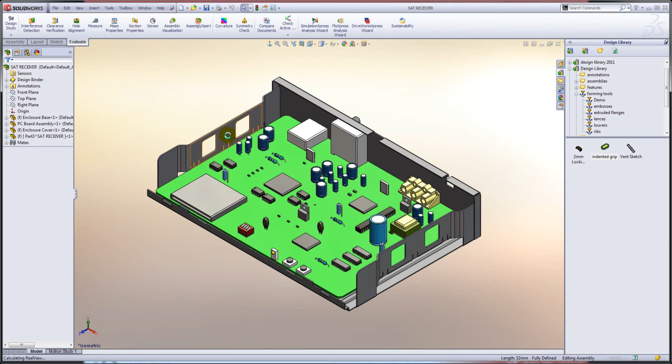Okay, so the first thing I have to do here is insert a brand new component. Now when you do this, the first click is quite important because it will place the front plane of your new component on the face or the plane that you select in the assembly. So I'm going to place mine on here.

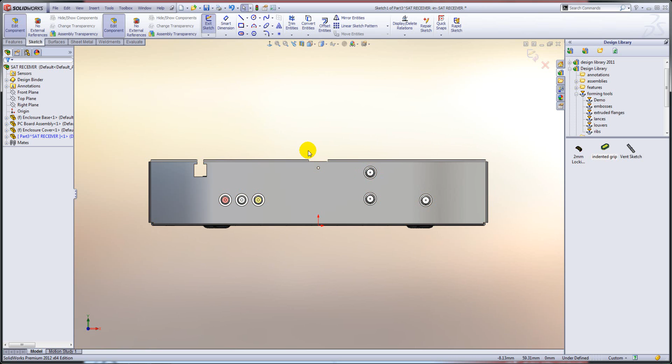Okay, it will also open up a sketch for us on that face. So all our sketch tools are now available to use. We're going to design half the cover and then mirror the body across to complete it. So let's go ahead and do that.

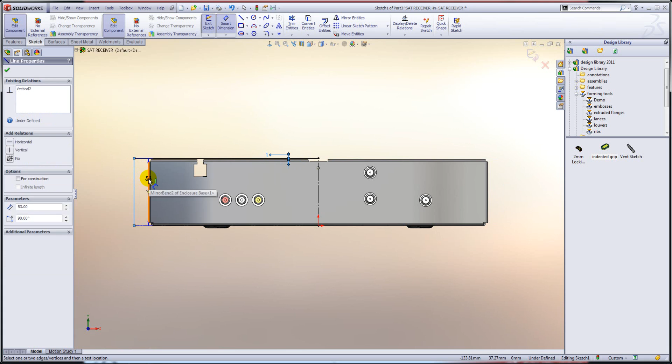Okay, I'm just going to sketch a rectangle, turn these lines into construction, and then determine a 1 mm offset on these edges. We'll also have a solid line along the bottom which just extends 30 mm from the edge.

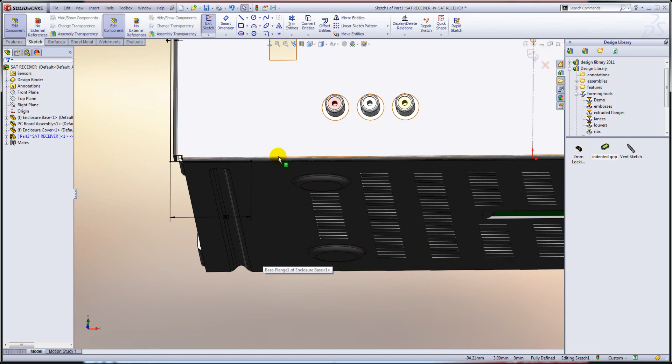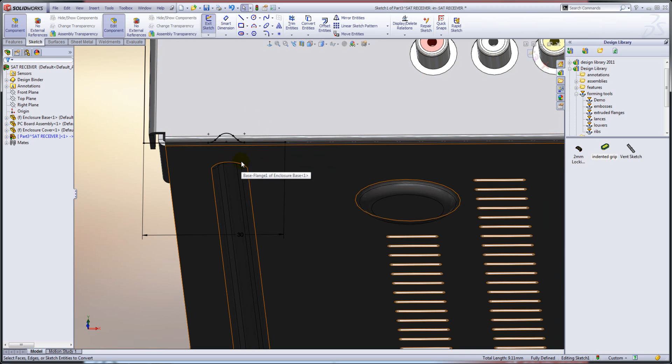Okay, so that's the basic profile I want, but if we look underneath, there's a form in the base plate, and I want this flange to follow that form. So the way I'm going to do that is right click on one of those edges, select the tangency, and then just simply convert those edges onto my sketch plane. I'll then just trim away that small overlap.

Okay, so my first sketch is done. We'll now exit the sketch and take that sketch and turn it into a piece of sheet metal. So we go to our sheet metal tab, and we're going to start off with the base flange tab tool.

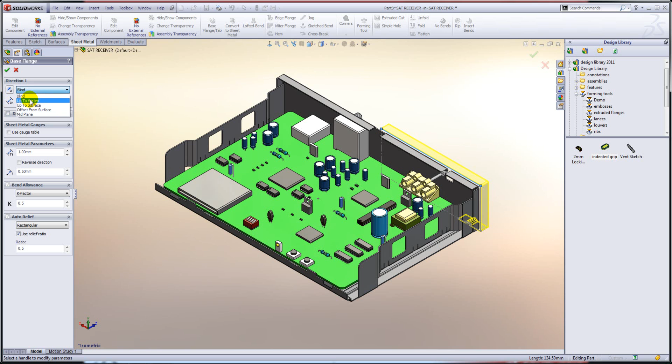Okay, so immediately as I click that, you see a preview of the base flange, and this is very much like the extrude property manager. You can send it in two directions, and you can determine end conditions as well. So in this instance, I'm going to go up to vertex, and the vertex I'm going to go up to is just that vertex there.

Okay, now within sheet metal parameters, we can define the thickness of sheet that we want to use and the default bend radius with it. So I'm going to go for 1 mm with a 0.5 internal radius. If we go normal to the face, you can see the preview there in the sketch, and I can send our thickness of sheet directly above or below that line.

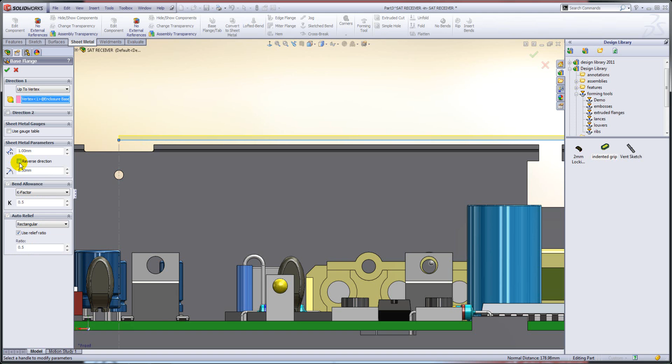With regard to bend allowance, you have several choices in here. You have K factor, bend allowance, bend deduction, or bend calculation. K factor will work out the size of the flattened sheet based on the neutral line. So we're going to use that one. We're going to set the ratio to 0.5.

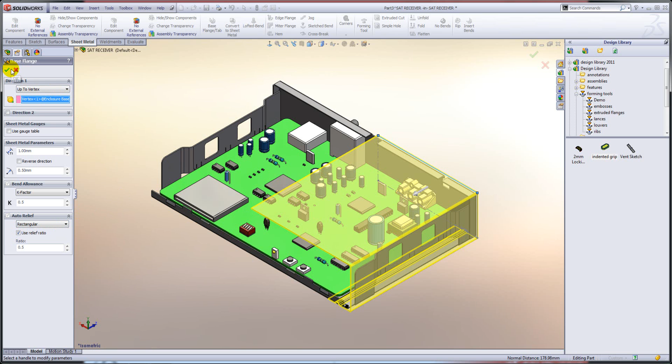We're going to set the auto relief to rectangular, yet we could specify tear or obround. We'll have a look at that when we see it in the model. Okay, so everything looks good there. I'll just press OK to complete that feature.

Okay, so in the part in my tree, that's actually generated 3 features for us. It's generated a sheet metal feature, which consists of all our default bend radiuses, reliefs, bend allowances. We have our base flange, which consists of our sketch and all the flanges that it's created. And our flat pattern comes in suppressed. And if we unsuppress that, the sheet will actually flatten live on the screen for us.

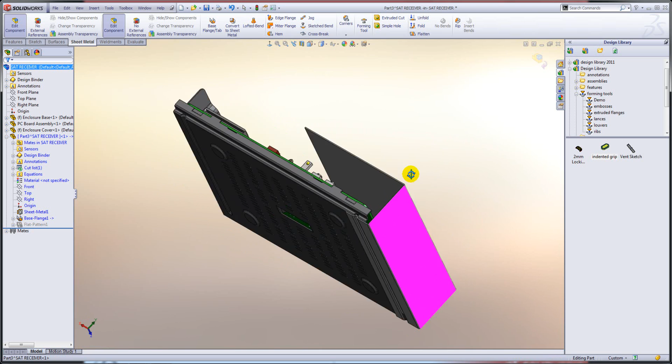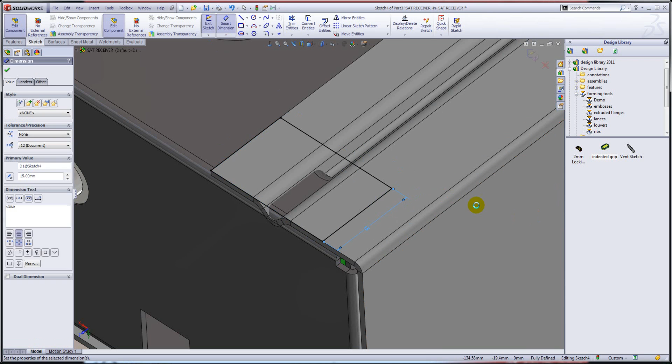Okay, now if we look at the underside of this, you can see that we've got an interference. So we're just going to remove that interference now, just with a simple cut. And I'm just going to ensure that the cut extends past that curved flange.

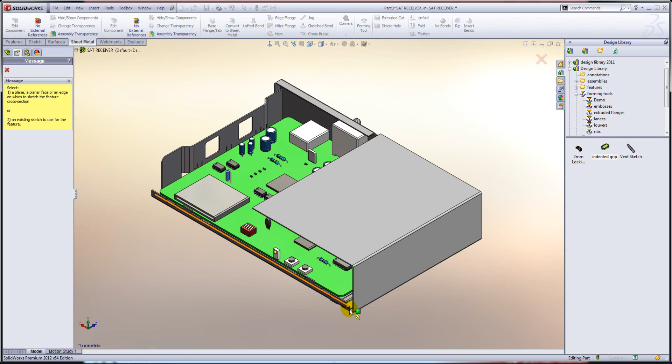Okay, the next thing we're going to look at here is a tool called the miter flange. Again, you'll find this on the sheet metal toolbar. We can select it and then select the edge that we want the flange to run along. So in this case, it's this edge here. And we're just going to zoom in on that corner.

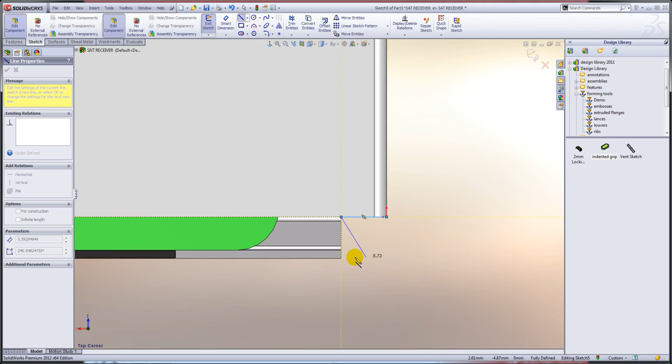Okay, so with the miter flange, you draw the cross-sectional profile of it. And one of the nice things about the miter flange tool is that you can draw multiple bends with it. So if I add 2 lines, for instance, it will create 2 bends, as you can see there. Okay, so at the moment, we're currently using the default bend radius.

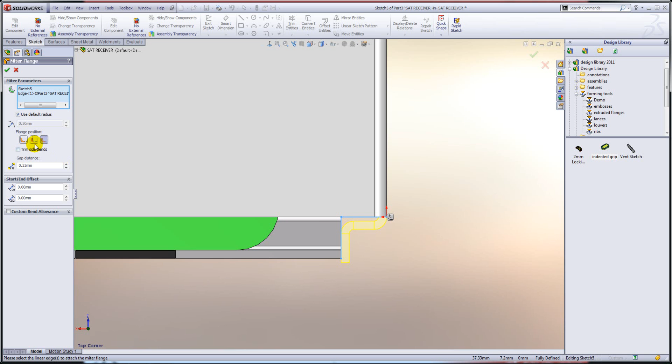We can specify the flange position as being inside, outside, or with the bend outside. In this instance, we're going to go material outside. We can also select multiple edges. So you can see that as I do that, in the preview, it automatically miters the corner for us. So it's a very powerful tool.

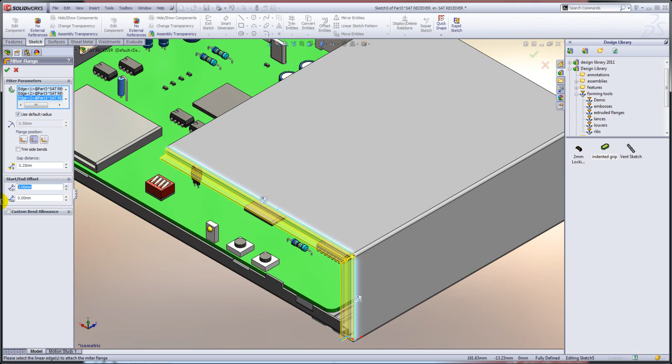Also, when we have multiple edges selected, this rip gap becomes available to us. And as I start changing that, you can see it changes the gap in this area here. We can also determine a start and end offset. So if I set that start offset to 4, for instance, it will just create a gap there, an offset of 4 before that flange starts.

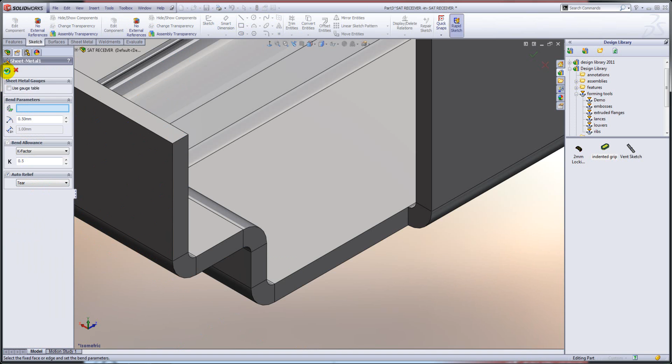Okay, so now that that's done, we'll just complete the feature. And if we zoom in on this corner here, you can see that it's put our rectangular relief in. Now, just to show you the difference between the relief types, if we go back into our sheet metal feature, tear will actually tear the sheet. And obround will just round that relief off, like so.

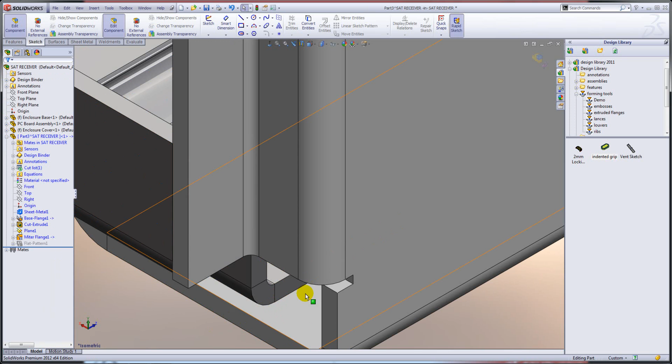Okay, another tool that we use commonly in sheet metal is the edge flange. Very simple to use. Just select it from the menu and then simply select an edge and you can drag a flange off in either direction. The angle of the flange can be determined within the property manager. And if you have lots of complex angles, a handy thing to use is perpendicular or parallel to face. So you basically select a face in this box here and then define whether it should be parallel or perpendicular to that face.

Flange length can be determined here. So again, we have various end conditions. I'm just going to fill in a value of 12. And that 12 dimension can either be taken from the outer virtual sharp, the inner virtual sharp, or from the tangent bend. So that's new to 2012. And what that basically means is that, let's say you had an acute angle that you were folding to. The dimension that you give it will be taken from the tangency of the bend. So imagine measuring it with a vernier, for instance.

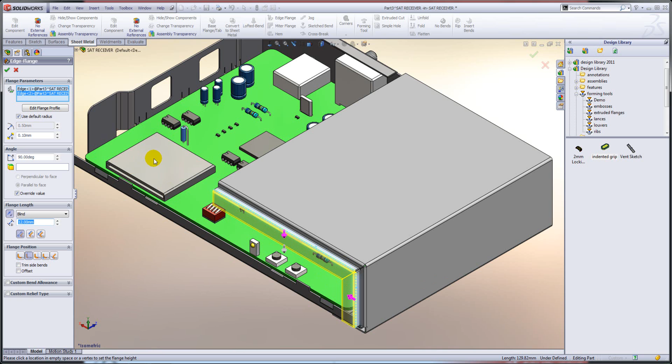Okay, so in this instance, we're going to go from the outer virtual sharp. You can also determine the position of that flange, material inside, outside, bend outside, from the virtual sharp or from the tangency of the bend. Okay, so in this instance, I'm going to go material outside. And I'm also going to select a second edge. So again, this is a very powerful tool. You can see it automatically miters that corner for us, which is great. We'll just press OK to complete that feature.

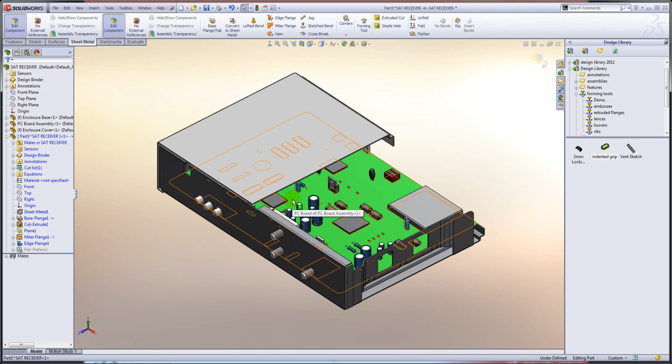Okay, so you can see what we've got. What we want to do now is actually mirror that whole body across. So we'll just spin it round and zoom in. Okay, so we mirror this pretty much as we would within a normal part. Click on the mirror tool.

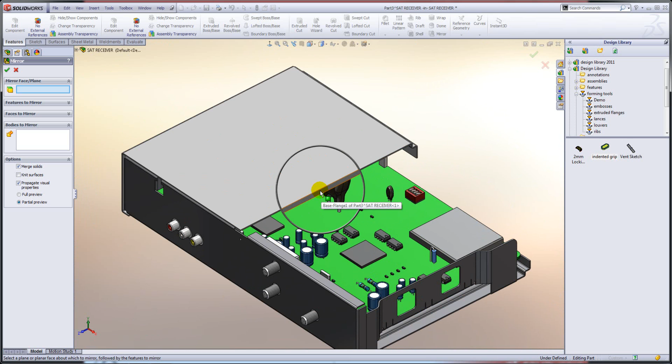One of my tips with working with sheet metal is because you have a lot of small faces, very thin faces, you might find that you're constantly zooming in and out to make selections. I like to use the magnifying glass a lot with sheet metal. That will just allow me to zoom in on a particular area of the model rather than zooming in on the whole lot. Okay, so from there I can pick the face and then just simply select a body to mirror. And there we have it.

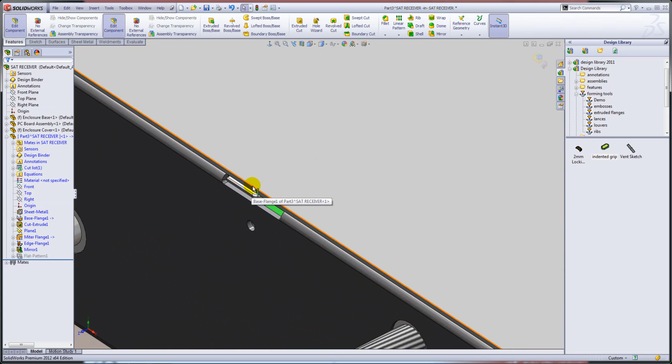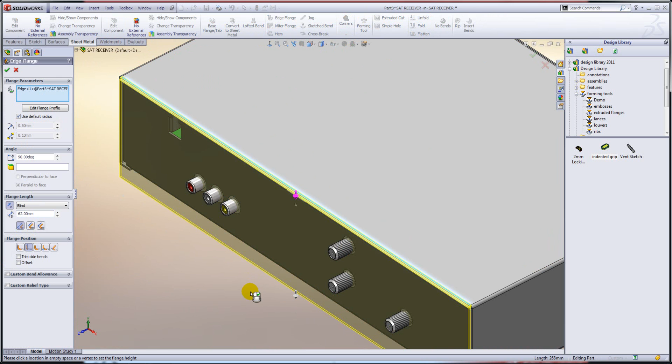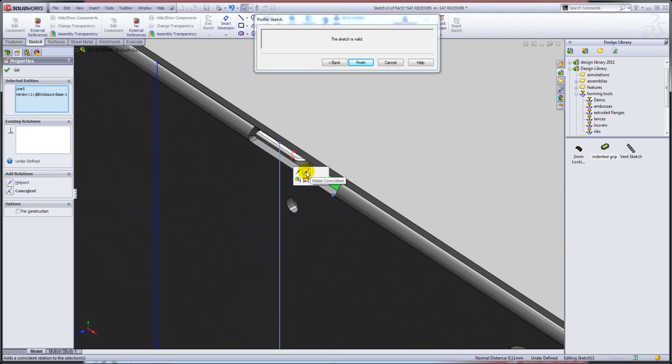The next thing I want to do here is I want to create a flange that sits inside that slot that we see there, which will eventually be fixed through this hole here. So with this we use an edge flange, but you can see that when we select edge flange, it selects the whole length of the edge, and that's not what we want. So we can just simply edit the flange profile, and that takes us into a 2D sketch, and we can start manipulating these sketches to be where we want. So all we'll do is zoom in and I'll create some relationships. Like so.

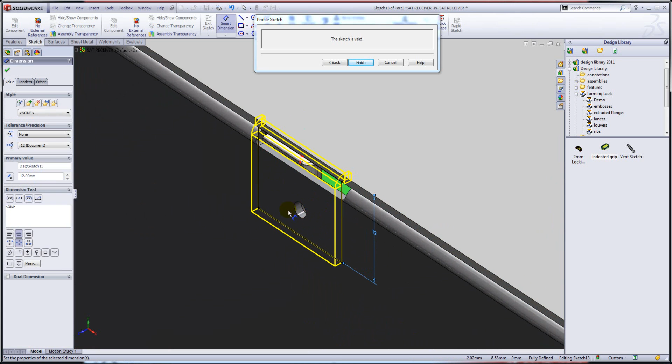Okay, now with this flange, at the moment we've got a closed profile. So it is important that you have a closed profile when you're working with this. But you can have a multiple contour profile as well. So for instance here I can select the edge of that hole and convert it to entities. So we actually design this with the hole in it.

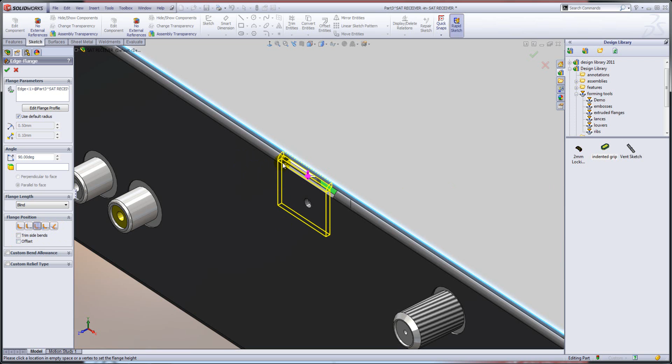Now if we go back, we have our choice of flange position, so it can sit inside, outside, bend outside, and so on. None of those give us exactly what we want. So to get it to sit all the way inside, we can use this offset. And that will just allow us to drag this out by a distance or an end condition.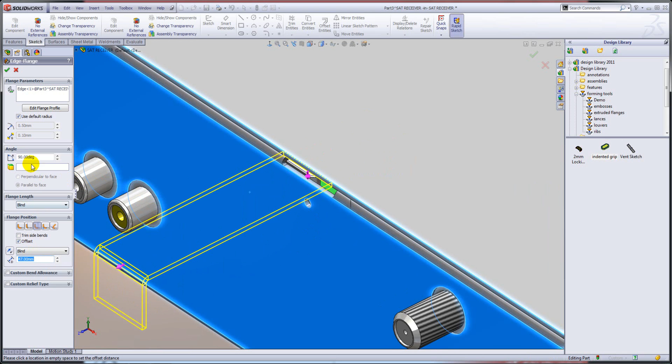And the nice thing about this is it can go either way. So what I want to do is specify a distance of 1, but have that sit inside, like so. Press OK, and you can see that it's done a really good job of that. And again, we can see the reliefs, and you can see the hole that has been placed in there as well.

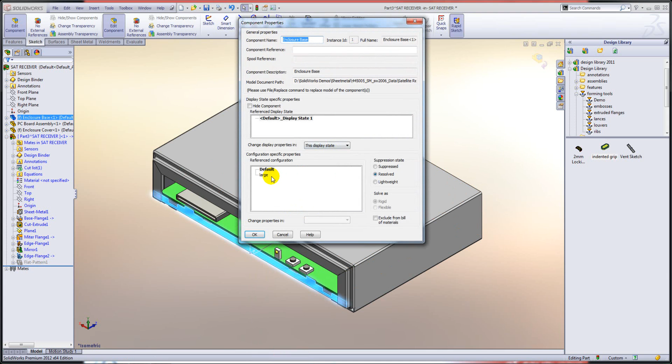Okay, so because we've designed this in context, we've created relationships between the cover and the base assembly, such that if I was to go in and actually update this base assembly to reference the large configuration, you can see that our cover will update with it. So you're building in some nice intelligence into the model there.

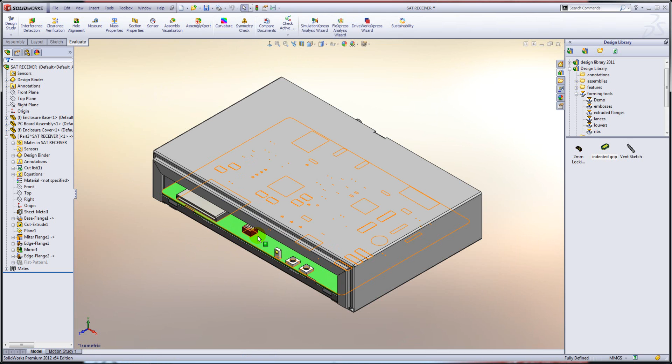Okay, now currently this part, this cover part, is internal. It has no external file at the moment. So what we're going to do is save this externally. First thing we do here is rename the part. We'll call it cover. And then just simply right click on it and save the part in an external file. And I'll just save it at the same path as the assembly.

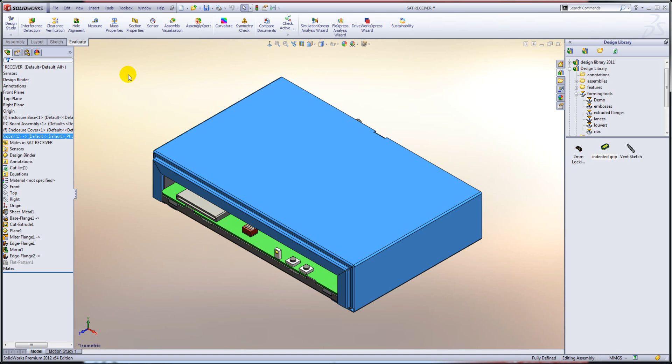Okay, now you might have noticed that the square brackets from around the cover in the feature tree have disappeared. That just indicates now that this part is saved externally. We can open this part in its own window and start to make some changes to it here.

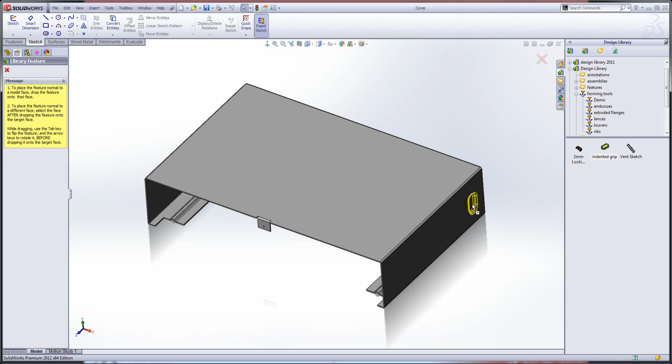So the first thing we're going to look at is the form tools. We have a Form Tools folder in our design library, and you can just choose to drag and drop a form tool in. You'll get a preview of it as you drag and drop it. You can flip its direction as you're dropping it or after the event. So as I drop it, that will launch the Property Manager down the left-hand side.

Now, this has had a revamp in 2012, so you'll see now we can really easily change the angle of the form tool, or we can flip the tool so it goes in either direction. We now have configuration support for form tools, so if you've created multiple configurations of a form tool, you can just pick which one you want from this drop down list. And we also now have the ability to link to the form tool, such that if you make any changes to your form tool, they will propagate through to anywhere where that's used if you want them to.

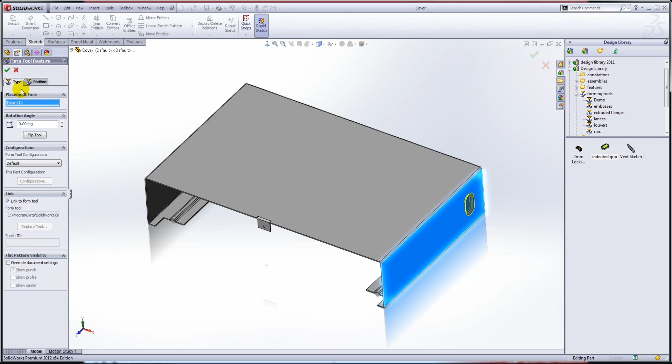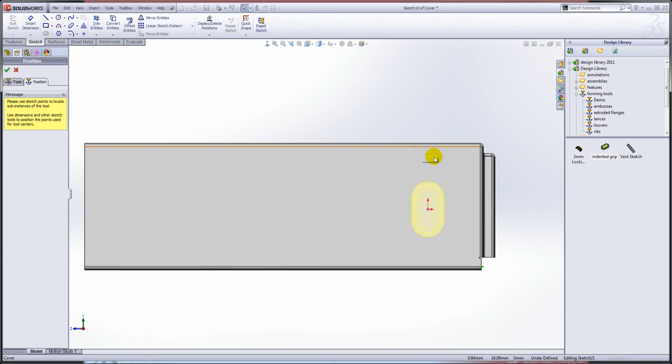This is now very much like the Hole Wizard Property Manager, where you select the type and then you define the position. So what happens here is it automatically selects the point tool for you, and if you want to add multiple instances of this form tool, you just simply add more points. Okay, I'm just going to dimension this. Like so. And then we'll hit the green tick to complete the feature.

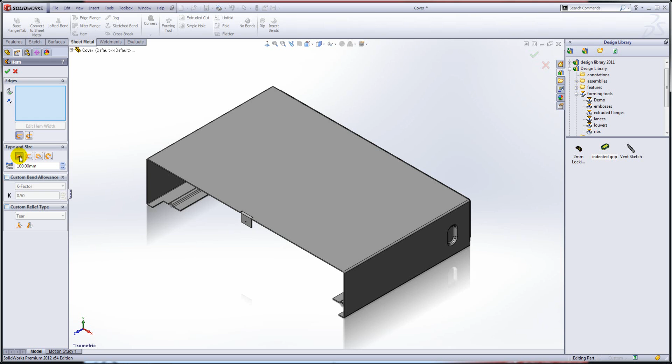Another nice sheet metal tool that we have is the hem tool. So with this tool, we can select edges where we want to apply the hem. You have a choice of several different types of hem. You can have closed, open, teardrop, or rolled. In this instance, we're going to go for closed. We'll come in and select an edge, and there we can see the preview of it, and we'll just set the size of that to 12mm.

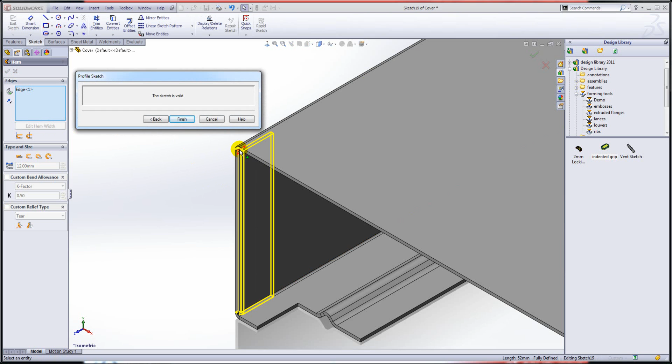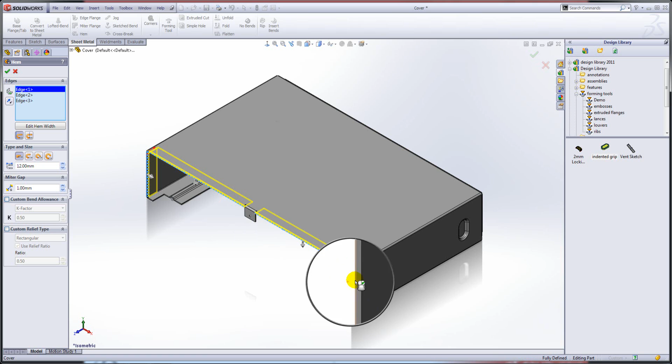Okay, now with the hem you can set the material inside or outside, and if you don't want it to run the whole length of the edge, you can edit the hem width and then just start dragging that sketch about. Okay, now I want to add multiple edges with this hem, so we'll use our G key again just to aid us in selecting our edges. Press OK to complete the feature.

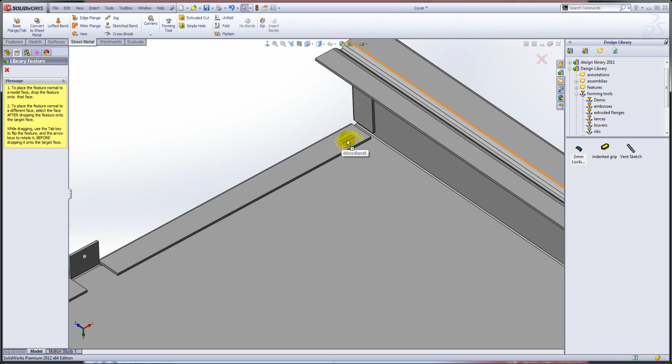Okay. On our hem we'll add another form tool, so I've got another one here, and we'll just drag and drop that on like so. And I just want one instance of this for the moment, and we'll just dimension it from this edge to here at, let's say, 15mm, and then 6mm from that back edge.

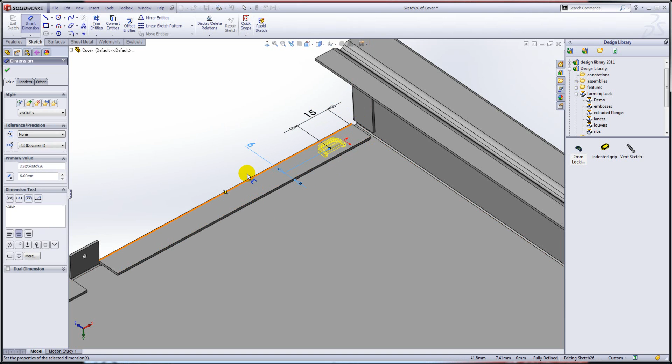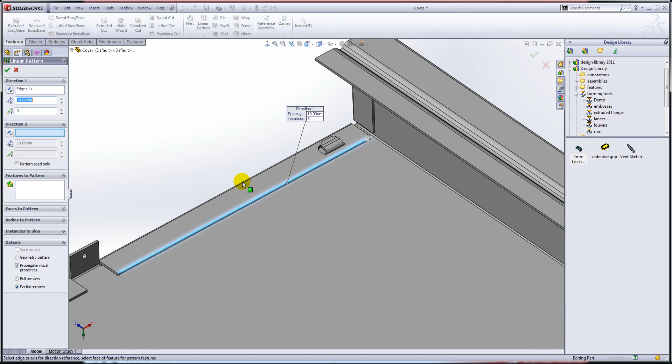Okay, now I actually want multiple instances of that, and the reason that I didn't do it in the Form Tool Property Manager itself is just to illustrate the point that you can actually pattern these form tools. Like so. And it's worth pointing out that we can also mirror them as well.

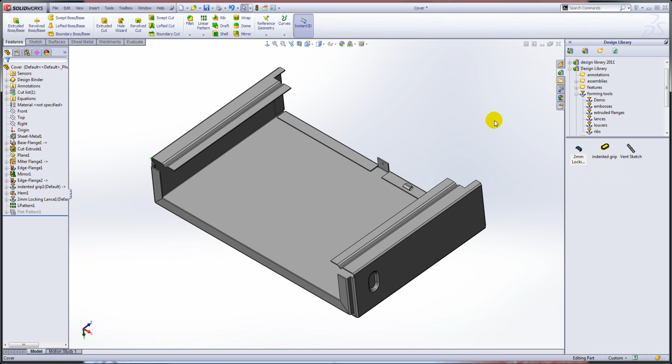Okay, so we'll take the pattern and the indented grip, and we'll mirror those about our right plane. Okay, so that's our part almost completed. There's a few other little bits and pieces I want to do here. One of the first things I'm going to do here actually is add some fillets.

So everyone's probably used the fillets that you'll find on the features toolbar. You may not have come across the break corner trim tool on the sheet metal toolbar. That will just basically allow you to do a simple fillet or chamfer. So what's the point of using it? Well, basically it's specifically for sheet metal parts, and it just makes the selection so much easier.

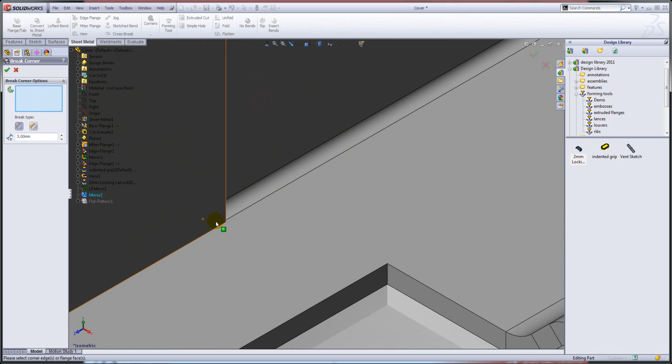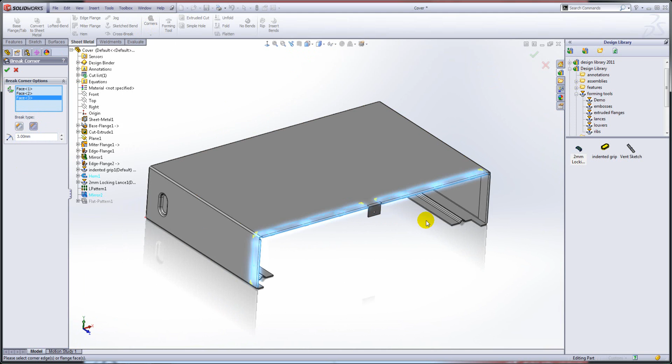If we were to use a normal fillet tool to remove some of the sharp corners, we'd have to zoom in on each edge and select that small edge there, often selecting through geometry. With the break corner tool, you just specify what you want, the size of the rad or chamfer, and then start picking faces. And because it's sheet metal, it automatically knows where to chamfer or fillet. So the selection process is much simpler there.

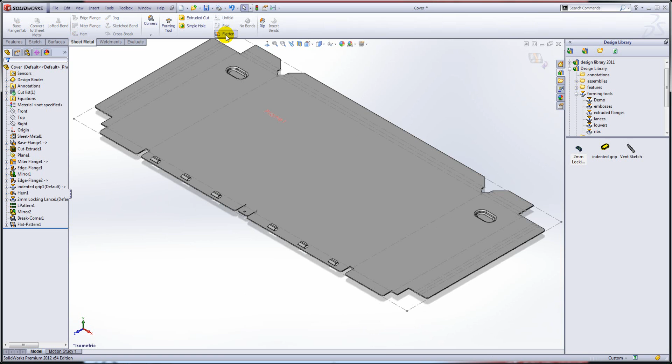Okay, now the flat pattern at the moment is suppressed, and to unsuppress it you just simply click on the flatten button, and we should very soon see a flat pattern of that. There it is. And what we want to do now is look at how we can reference that flat pattern within a drawing. Okay, so I'm going to just draw your attention to the configuration manager, and within here at the moment we just have our one default configuration.

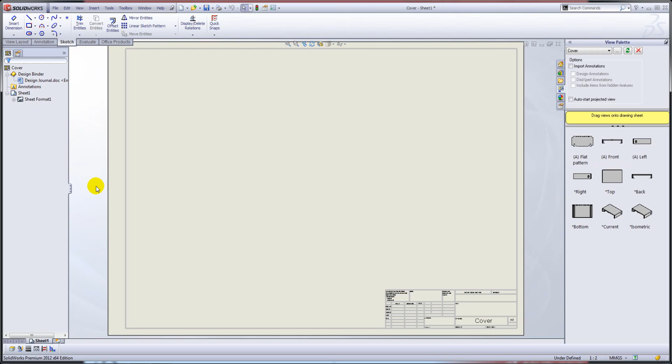Now if I go to File and then Make Drawing from Part, we'll pick our border. You'll notice that in the view palette we have all our standard views, but we also have a flat pattern view. Let's just drag that in and we'll change the scale to, let's say, 1:2. Okay, so how does it get that flat pattern view?

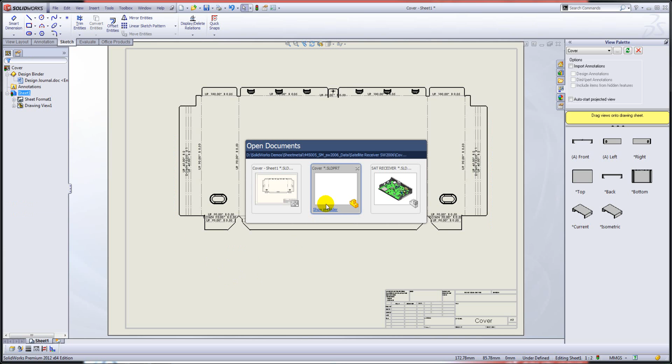Well, what happens if we go back to the model is that a new configuration is automatically generated as soon as you use this part in a drawing. It creates a flat pattern configuration. And if we just split this in two, in the default configuration, that feature remains suppressed. In the flat pattern configuration, it's unsuppressed. Okay, now it's quite important that once you've created your drawings, etc., you keep the default in the folded state and the flattened in the flattened state.

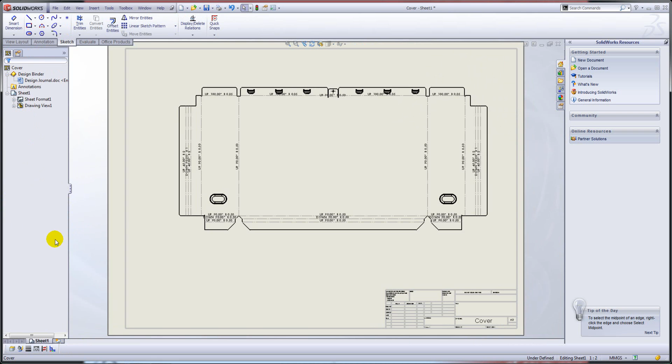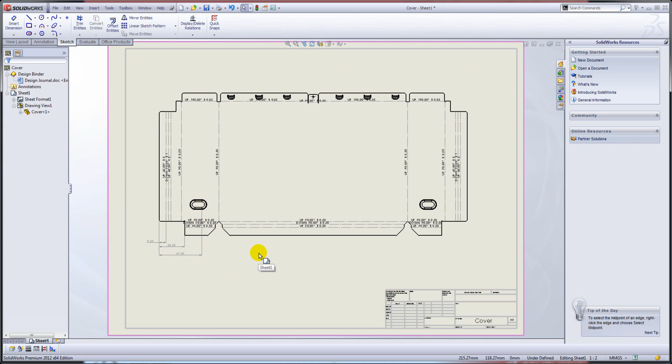Okay, so back to the drawing now. What can we do with these drawings? Well, as you would expect, we can dimension them. We can dimension to bend lines, to model edges, to form edges, etc. We can also make these drawings look a bit nicer and a bit easier to read by harnessing some of the additional options for sheet metal within our document properties. So to do that, we just go into Options, Document Properties, Sheet Metal.

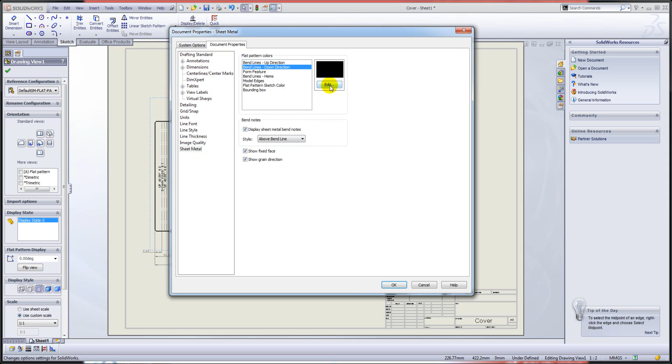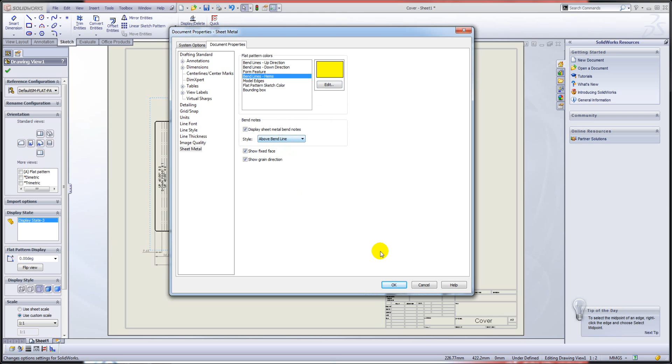And within here, for instance, we can change the bend line colour in the up direction to, let's say, blue, in the down direction to red. We'll change the form features to an orange, bend lines for hems to, let's say, a yellow. You can also determine where your bend notes are. They can be above, below, or with the leader. Okay, so by doing that, the person that's actually making the part has a better visual guide of how it actually is made.

Now from here, a lot of people that use laser cutters and punch tools will tend to save that out as a DXF. There's a couple of things that can go wrong when you're doing that. One of the things is the scale. Let's say we put this on a scale of 1 to 5. People get confused when they're saving as DXF what scale they are saving out as.

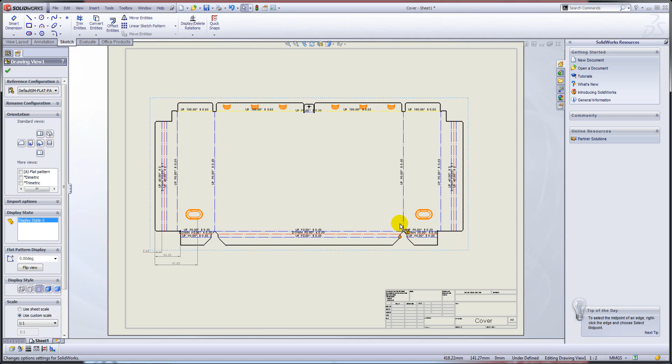The other thing that people have to do is remove quite a lot of the detail. So perhaps they don't want the bend lines, the bend notes, the border, the form tools, that sort of thing. A lot of the time they just want the outside profile. So in my opinion, it tends to be better to save it out as a DXF directly from the model itself. It's very simple to do. It's just a case of right-clicking on the model. Doesn't matter if it's in the folded or flattened state, and then go and export to DXF or DWG.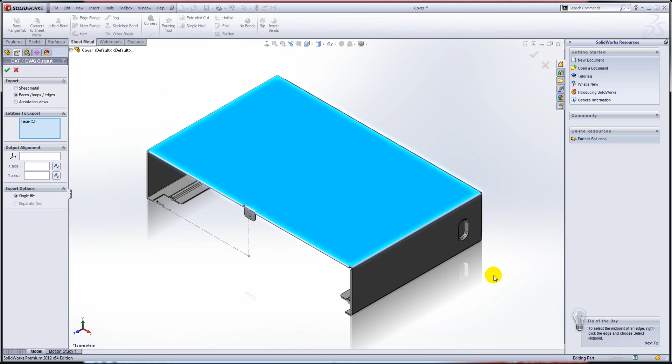At this stage, we give it a name, and we just have to ensure that we select sheet metal. Now, it gives us some options here of exactly what we want to export. So we can export the geometry, so we want to do that. We can include things like bend lines or exclude them, sketches, library features, form tools. It's up to you what you want to include and exclude. In this instance, I'm just interested in the geometry.

So I press OK, and that will launch a preview window of exactly how that will save out. So there it is there.

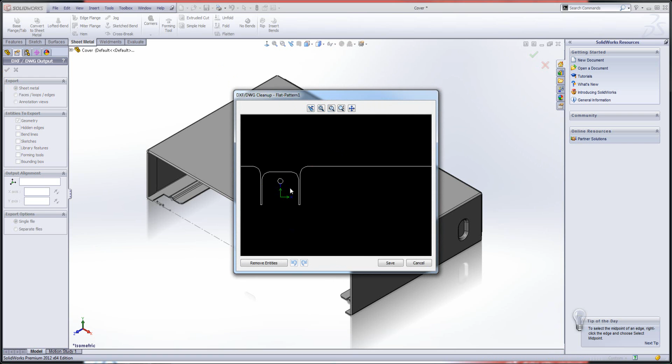Again, the nice thing with this is that you can clean it up prior to actually confirming the save. So let's say, for instance, we are only interested in the outline. We can take that hole and just remove it. Okay, so now we're ready to save it. We can just click on save, and that's done. And it will always save out at a 1:1 scale.

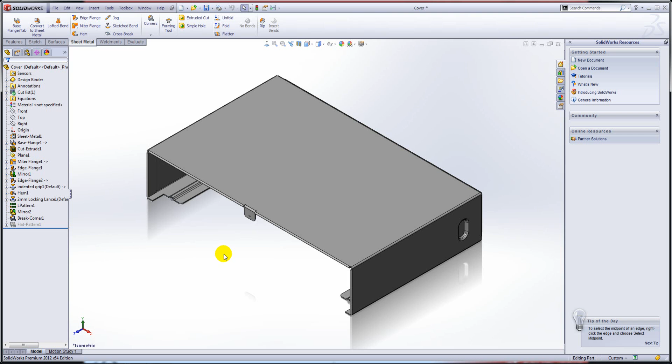Okay, some other nice tools that we can use in sheet metal. One of the things that isn't necessarily for sheet metal, but just a standard tool that people tend to not use so much, is the fill pattern, and it's quite a powerful tool. You pick a face, select the fill pattern, define your fill boundary, which is a face or a collection of edges or sketch lines. You can define your pattern layout from the options there.

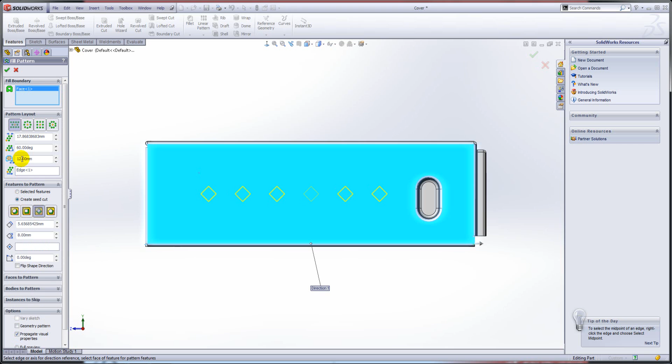I'll skip that and we'll just go to create seed cut. This is where we can use a predefined shape to cut our model. Now we'll go back up. Well, let's in fact just change some of these dimensions.

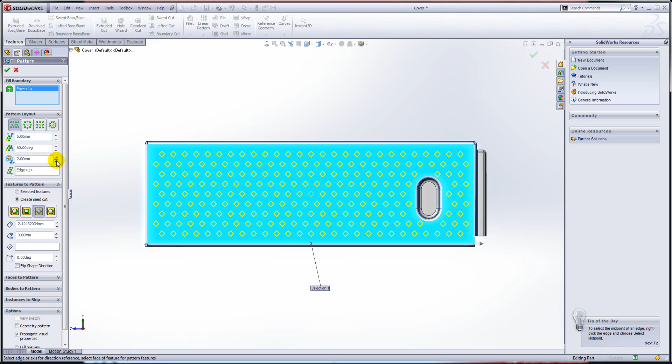We're just going to set it to have a 6mm spacing, 60° stagger angle, and a margin of 12mm. Now you can see it's really intelligent in as much as that it will actually go around features and try its best to fit those pattern cuts in.

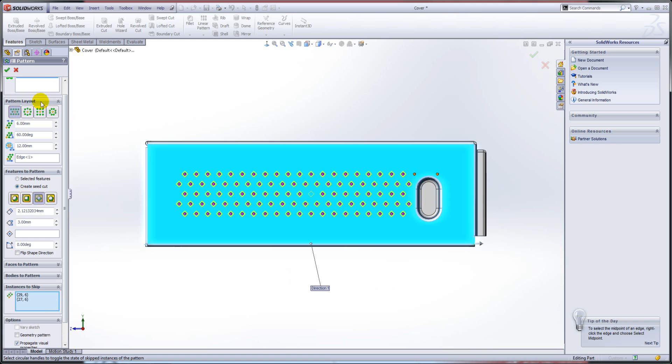Now let's say, for instance, I don't want all of those. I can come down to instances to skip and just remove a couple. And when I'm happy, I can press OK to just complete that feature.

Okay, from the design library, I'm also going to just drag in a sketch. And we're just going to place that sketch on the origin with a coincident relation. And add a dimension to constrain it.

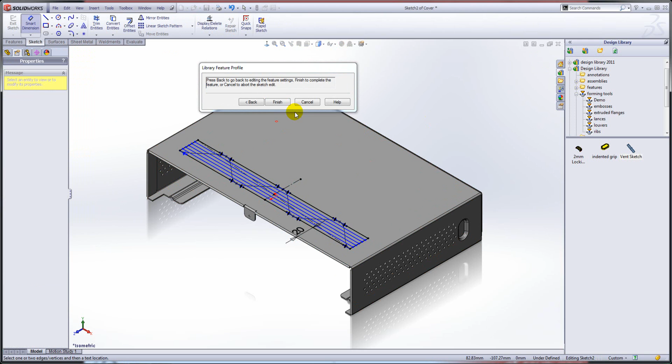Okay, now I'm going to use the vent tool to create a vent in this sheet. So again, some of you may not have come across this tool. I'm going to launch it using the command search. So to do this, we just tap S on the keyboard. And if you look at the top right hand corner of the screen, by pressing S, it actually activates the command search. Then from there, if we just type in vent, you can see it finds a tool for us.

We can launch a tool directly from there. Or if you want to know where it is for future reference, just click on the glasses and it will place a subtle red arrow next to it. Okay, so we'll go ahead and launch it.

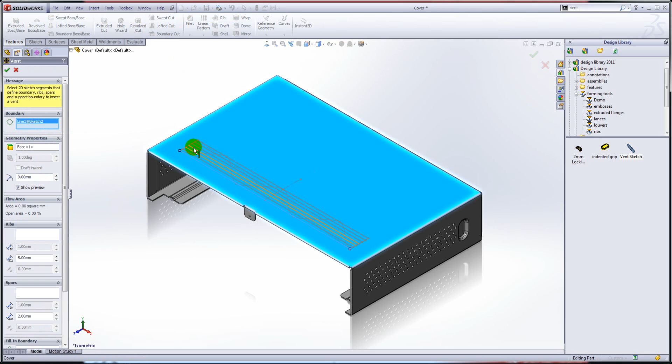First thing it asks us for is the boundary. So we're going to select the outer rectangle of that sketch. It will then ask us to define our ribs. So all we do here is select the internal portion. Let's just change the width of those to 1.5.

And we'll also select the spline as well. Okay, so within here you can define the width of the spar and ribs. You can't, with sheet metal, define the thickness because it's sheet metal. It has to be of a uniform thickness throughout. You can define whether you want radiuses. So if we zoom in and just turn on 0.5mm radiuses, you'll see the preview change, like so.

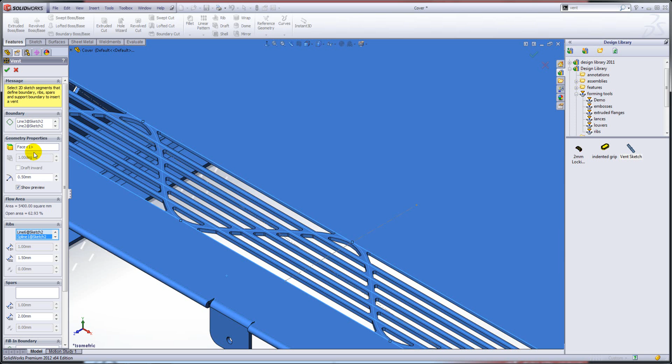And let's say it's a plastic part, you can add draft to it as well. To complete the feature, we just press OK. So very quickly, we've created our vent. That for me is a very powerful tool.

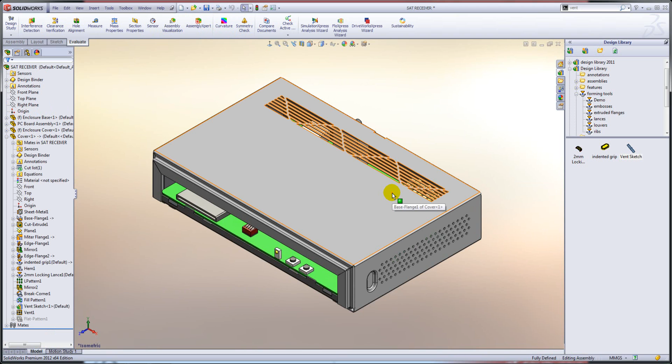Okay, now if we go back to the model, you can see all of those changes have propagated through. And the last thing we're going to do here is just insert face bezel. So we go to Insert Components, browse to our face bezel, and we'll just insert it. Now just notice within here we have a little star symbol next to our component.

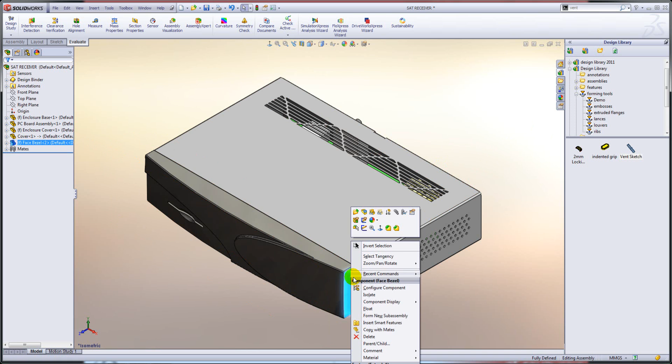That just indicates that it is a smart component and you can bring features through with it. To insert those features, just right click, Insert Smart Features, and then just pick the reference face that you want to apply that to. So we're just going to select the face of our cover, press OK, and if we isolate our cover, you can see that it's automatically added 3 hole cutouts there.

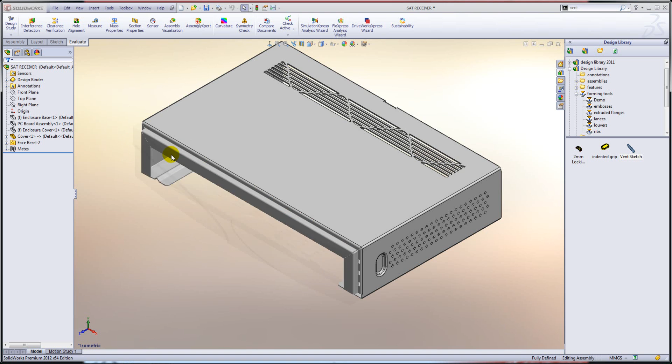Okay, so that brings us to the end of this demonstration.